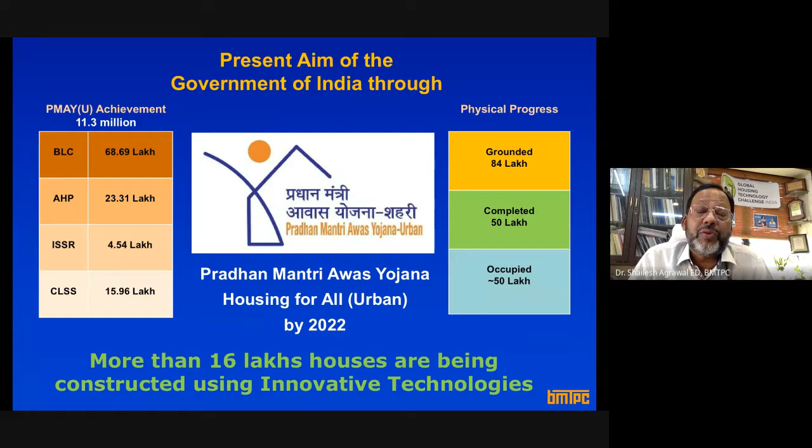Friends, this was the background: when we thought we have to build so many houses, do we have enough material? Do we have enough infrastructure to execute this? Can we do it within the time frame given to us, without vitiating mother nature, without vitiating our natural resources, without creating pollution and waste? So we thought it is high time we bring in technologies, systems or materials which are sustainable, which can help build faster, and which can help in the sustainable development goals and climate mitigation strategies, to which India is also committed, to reduce carbon footprint.

This is a slide for civil engineers. Normally, construction all over the world falls into two categories, as you can see in the pictures. One is load bearing construction, where you put brick by brick, create the wall, and then put the slab. The other is cast-in-place construction, where you create reinforced concrete beams and columns, and then do the infill walls. Now, these two approaches are slow track construction.

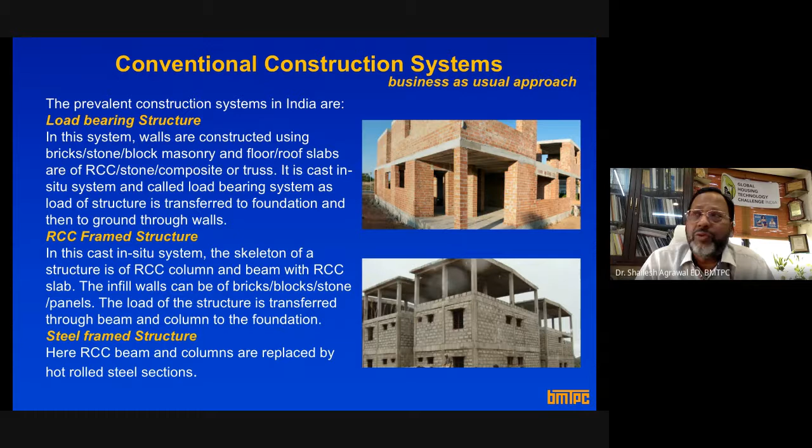They require a lot of natural resources and create a lot of pollution. The kind of material we are using is quite energy intensive. So all of this is business as usual, and if we continue to construct with these practices in vogue, we will not be able to achieve the target given to us, and we will be harming mother earth, encroaching upon natural resources which are already in short supply.

This is again a slide. Primarily the major construction materials are cement, aggregate, and water. Earlier it was said that you require a lot of water when you do any construction, because water is required for curing and such, and that water is potable water. You require drinking water, and water is scarce, as all of you know.

And there is another thing: fine aggregate, sand. Earlier there used to be a proverb saying the next world war would be fought over water. Let me tell you, the next world war would be fought over sand. If you Google 'sand war', you will be astonished to see that sand has all of a sudden become scarce. We never thought so, since we always used to extract sand from rivers or through mining, but nowadays sand is being manufactured. Sand has become a scarce material because we have been irrationally managing our natural resources. That is why, if you watch TV, you will find advertisements for sand making machines. Just imagine, now we have to make sand.

Similarly, during COVID time, we understood the importance of labor, skilled labor. All of a sudden, all the projects came to a halt. So can't we have industrialized systems where, whether it is a pandemic or any natural hazard, the work keeps going without delays? There is a shortage of skilled labor, and most construction is not up to the mark if we continue with this business-as-usual approach.

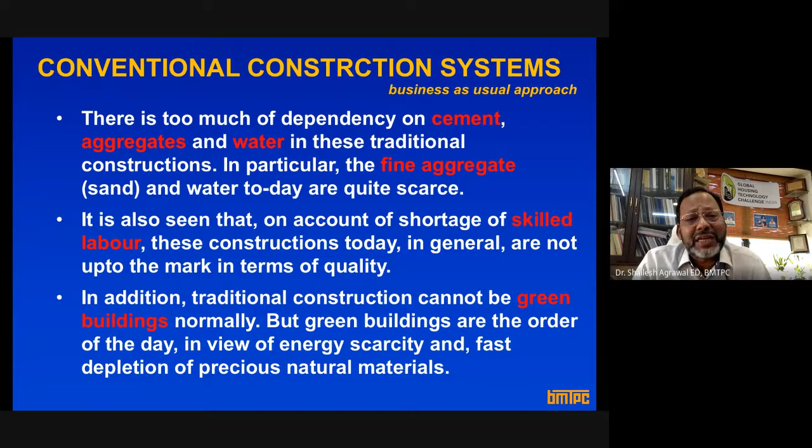Hiteshji was talking about how, earlier, as civil engineers, we never bothered and always took cement and brick for granted. But now these materials can no longer be taken for granted because they are unsustainable. Cement produces a lot of greenhouse gases, and its embodied energy requirement is high. Brick consumes topsoil and also emits greenhouse gases like carbon dioxide. So green buildings and sustainable practices are the order of the day, and we need to practice those in day-to-day construction and building our infrastructure.

Also, please take this from me: as a true patriot or true citizen of India, whatever we do, we have to do pretty fast. And when I say pretty fast, it doesn't mean sacrificing structural, functional, or other requirements. Speed doesn't mean compromising quality, affordability, sustainability, or disaster resilience. But whatever we have to do, if we want to lead the world, we need to bring in speedier construction systems and technologies in whatever we do.

Green, because this is something of green. Ever since I've heard this word green, everybody defines these green buildings in different ways. So I have written that green aspects can be explained in four major parameters: resource efficiency, energy efficiency, eco-friendliness, and health.

Resource efficiency means we cannot always take materials for granted, like cement, which is based on natural resource limestone, or steel, which is based on iron ore. So you need to bring in materials and systems which are resource efficient. I don't say don't use cement, don't use steel, but use them optimally. All of us know how work takes place at the site - there is no control on use of water, no control on use of other materials. So let's optimize the use, let's bring in natural resource efficiency.

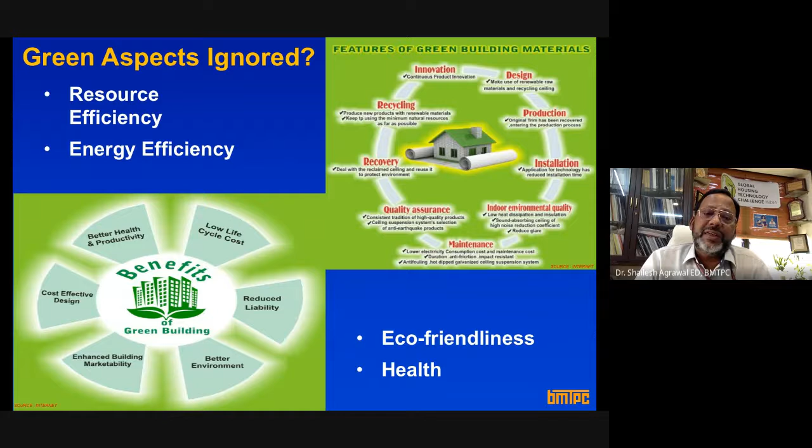So health of the occupant is also very important, and that is why greenness can be explained in resource efficiency, energy efficiency, eco-friendliness, and health of the occupants.

Again, this is a slide from Energy and Resources Institute, and because I am dealing with buildings, residential sector - buildings consume 40% of precious energy resource, 25% of precious water, and 40% of natural resources.

At the same time, building activities contribute 50% to air pollution, 42% to greenhouse gas emission, 50% to water pollution, and 48% of solid waste is being generated through building activities. So can we cut this down?

On one side, buildings consume precious energy, water, and natural resources, and on the other side, they contribute to pollution, greenhouse gas emission, water pollution, and generate solid waste.

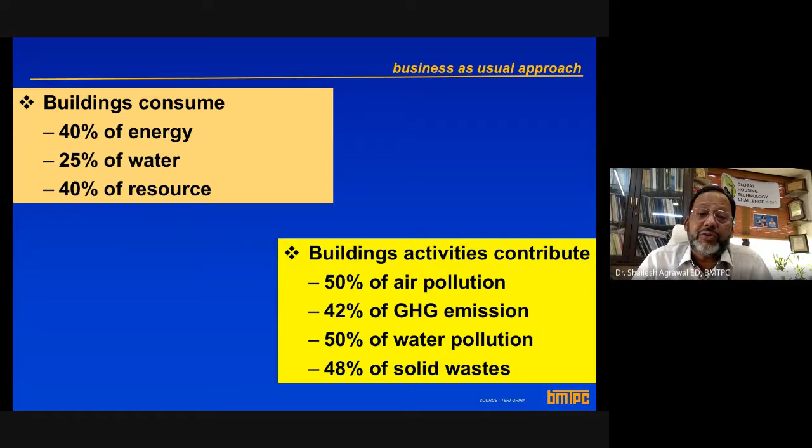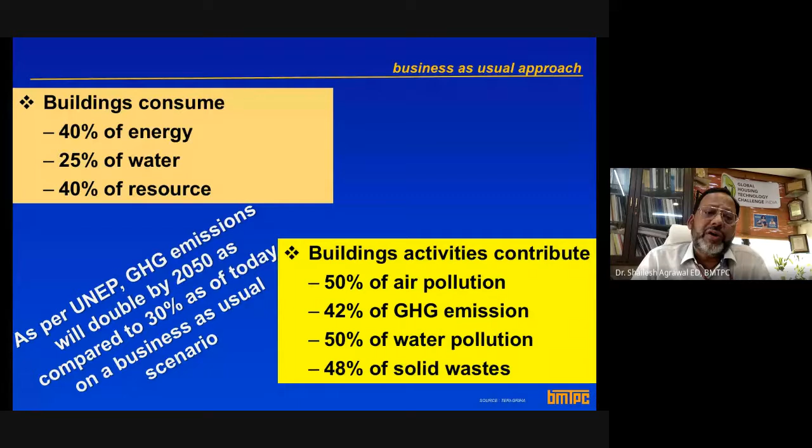Also, as a signatory to the Paris Agreement, we need to cut down our carbon emissions, and if we continue to have that business-as-usual approach to greenhouse gas emissions, and continue to use these building materials and technologies which are in vogue, the greenhouse gas emissions will double by 2050.

So what is required? We require something new. We require out-of-box thinking, and that is what is being done at Government of India level. We have come out with some technologies which I'll be explaining quickly.

So whatever I just explained is written here, that we require speed. Quality cannot be compromised anytime, and I come from a field of earthquake engineering, so we have seen structures showing no distress, and whenever there is an earthquake or a cyclone, those buildings start showing distress or extensive damage, and it happens because qualities are not up to the mark.

So quality is also very important. Safety - India is a country which is prone to natural hazards, whether it be cyclone, flood, earthquakes, and nowadays even thunderstorms. So safety of structure is very important.

Sustainability - this seminar is all about sustainability. So as civil engineers, as architects, or as policymakers, whenever we think of any project or build any infrastructure or building, sustainability has to be kept in mind. And sustainability is a very wide term. As I told you, if we can ensure energy efficiency, eco-friendliness, health, disaster resilience, somehow we are able to achieve that sustainability. Life cycle cost is another new term which is being coined now.

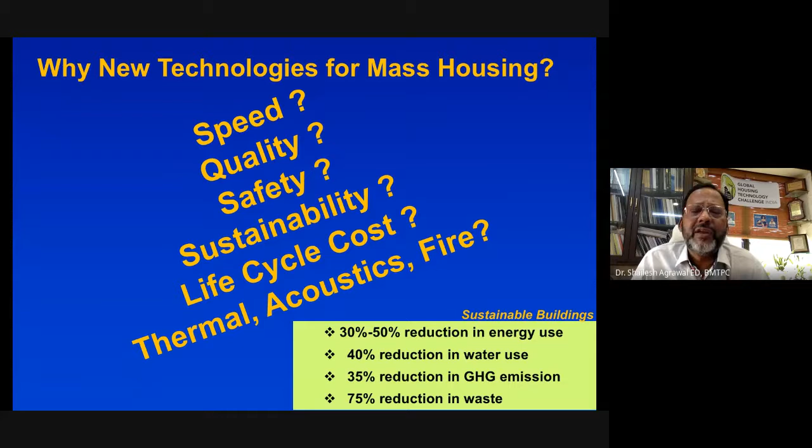And have we ever thought, whenever you go to any project site, you will find heaps of construction waste. So now, in times to come, there is going to be a rider that whatever waste you are producing during construction has to be consumed in that project itself. If you go to UK and places like that, you have to have zero waste product. So similarly, can the kind of waste we are producing be utilized in the project itself, or do we have systems, technologies and processes where we generate no waste when we do the construction?

This is a very interesting slide to show you, all of you can understand. These are the levels of construction technology all over the world - level 0 to level 4, and I will explain what level 4 is. Just let me pause for a second here, and you all try to assimilate this slide and think about at which level you are, or at which level you understand or know about. In the world, or even in India, we have reached up to level 4.

Most of you will agree that the answer in your mind is level 0. Level 0 is where we collect material at the site, call masons, supervisors, contractors, developers, and ask them to start building the structure, building, or bridge. So collecting material at the site and doing construction, that is level 0.

Level 4 is where the entire building, pre-finished, is done in the factory. All you have to do is bring that building to your site and start using it. It's like a plug and play home.

I give the example of plug and play. What is plug and play? Your USB drive is a plug and play device - you put it in your computer or TV and start seeing the movie, videos, photographs, or presentation. The same thing is being done in building construction. That is plug and play homes.

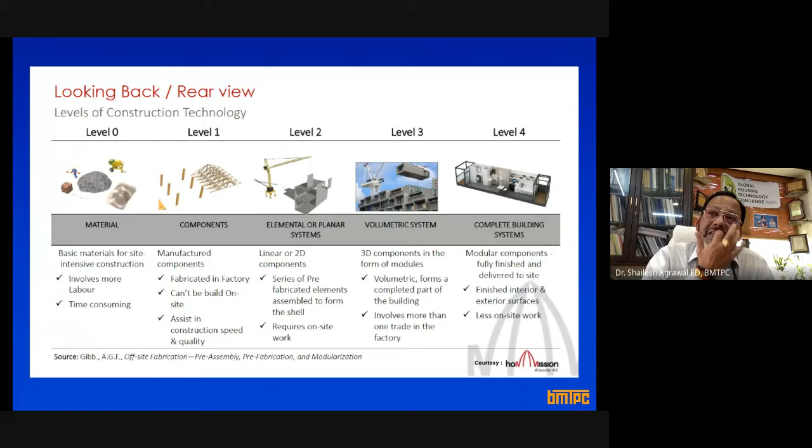As Ritesh was telling you, I normally don't preach - what I preach, I practice. So we are already doing a project at level 3, where building modules, or the rooms, will be treated as building blocks. They will be fabricated in the factory and then put one over the other to create the multi-story tower.

The world has reached level 4, and through the Ministry of Housing and Urban Affairs and the Building Materials and Technology Promotion Council, we are trying to take a leap jump - I call it a pole vault. So from level 0 to level 4, we want to reach, and that's our sincere attempt.

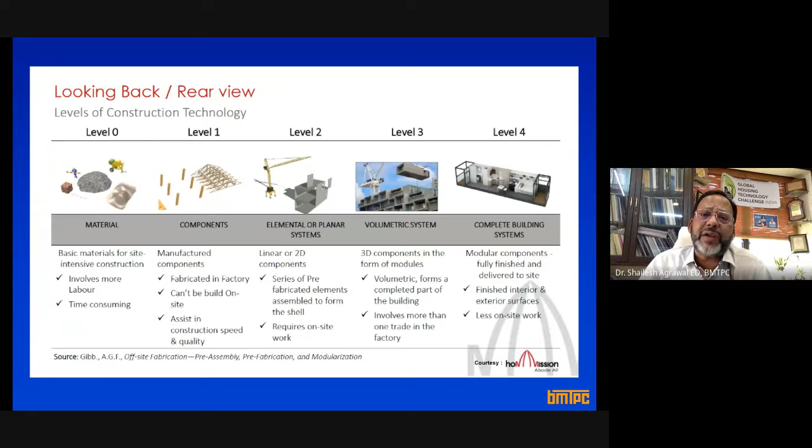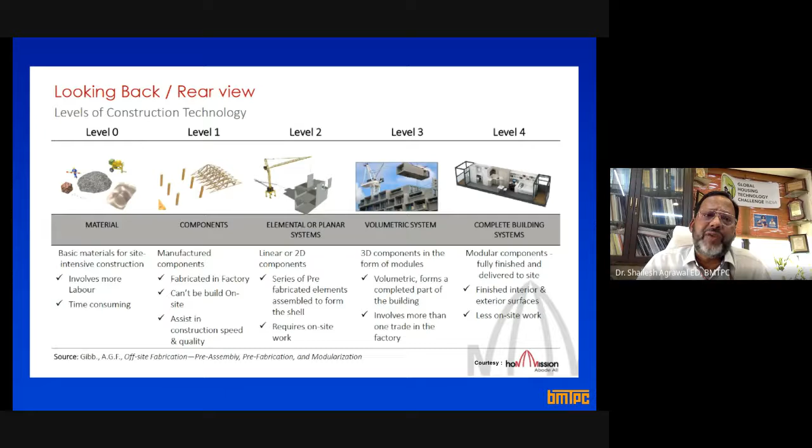You all will agree with me that the background I gave shows the advantages associated with taking a jump from level 0 to level 4. I'll go through this slide very briefly now.

All these technologies are customized. So a new term has come into the market: design for manufacture and assembly. You go to the tailor and ask him that as per your requirement, your size, your fit, you get the shirt or jacket made. The same thing can be done in building and infrastructure construction.

There are companies who are like the tailor - they do design for manufacture and assembly. Give them your requirement, give your sizes, and they will do everything for you. They will create a plant, construct the building themselves, and then bring it to the site.

So there are agencies now - no longer just contractors and developers, but agencies who do design for manufacture and assembly. I also want to coin a word here: manufacturing of buildings.

Just try to think - instead of constructing a building, we are going for manufacturing of a building. Once you understand the difference between constructing and manufacturing a building, you understand what I'm talking about. Manufacturing a building means you take the entire operation from the site to the factory, and you start manufacturing a building.

If you visit any car manufacturing facility, you'll see assembly line production, where each person puts one part, and the end product is the complete finished car. The same thing is being done in buildings, where components are put together piece by piece, and at the end you get the building manufactured. There are agencies in India already doing this.

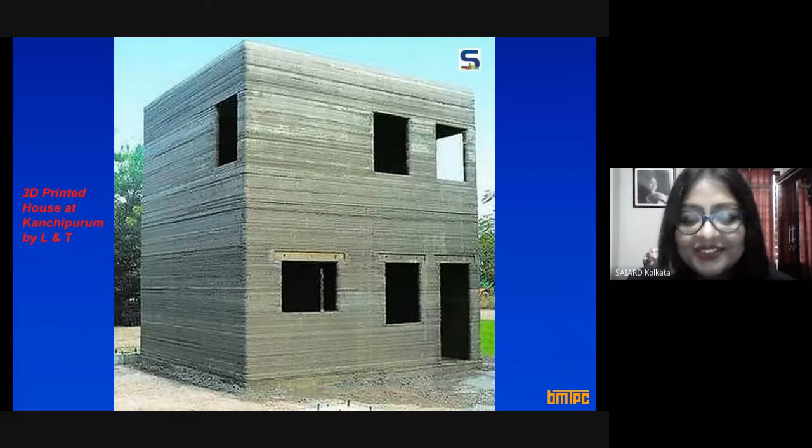Sorry to interrupt you, sir, but you had 25 minutes, and you've already gone over the time limit. It's okay, you just finish it. It's okay, 5 minutes, I'll finish, no issues. I will finish in 5 minutes.

So this is again a slide to show you that right here in India, this is the 3D printed house. I was fortunate enough to be part of this initiative, and it was inaugurated by the Honorable Finance Minister. This is in Kanchipuram in Tamil Nadu, the 3D printed building.

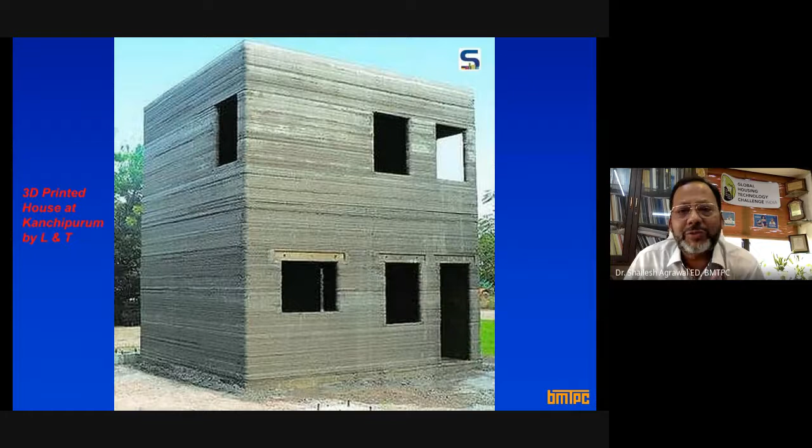All of you know 3D printing means you give a command to the computer, like creating a picture or a Word document, and your computer gives you the printout. In a similar fashion, you give a command, and here you have a cartridge, there you have construction ink. Construction ink is nothing but a special kind of cement, and by a click of command and through robotics, you can print this kind of building. So this is the first 3D printed building in India.

With this background, let me tell you that we have shortlisted around 54 new construction systems, which are broadly classified into 6 broad categories. I will not go into detail because I am already encroaching on your time.

So what you can do is, if you are interested in these construction systems, go to my YouTube channel. Type my name or BMTPC, and you will get a whole lot of literature and educative films. We have created video lectures also in pedagogy form, where you can learn and understand about these construction systems.

I'll just tell you these construction systems are broadly classified into 6 broad categories: formwork systems, stay-in-place formwork system, sandwich panel system (also known as drywall construction), steel-based structural systems, and precast concrete construction system.

Let me tell you about precast concrete construction system. All of you might have seen how the metro is being done, how earlier bridges were constructed, and how bridges are being constructed now. The girders and columns are made in the factory, and one fine day the columns are erected, the girder is put over them, and then the metro operation starts. Similar kinds of things are being practiced in the construction sector.

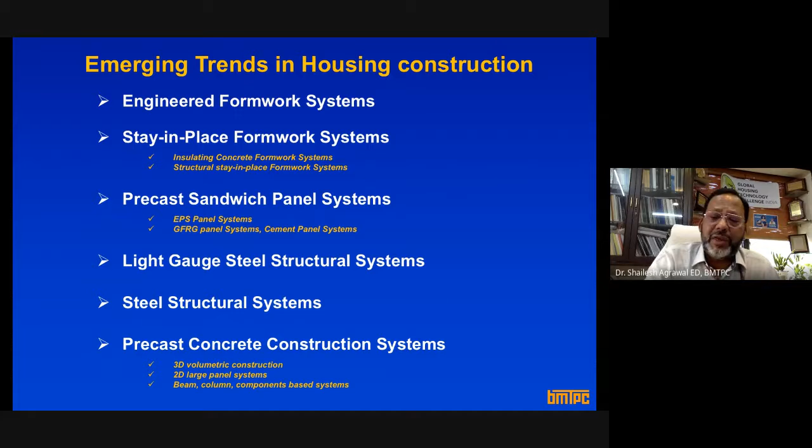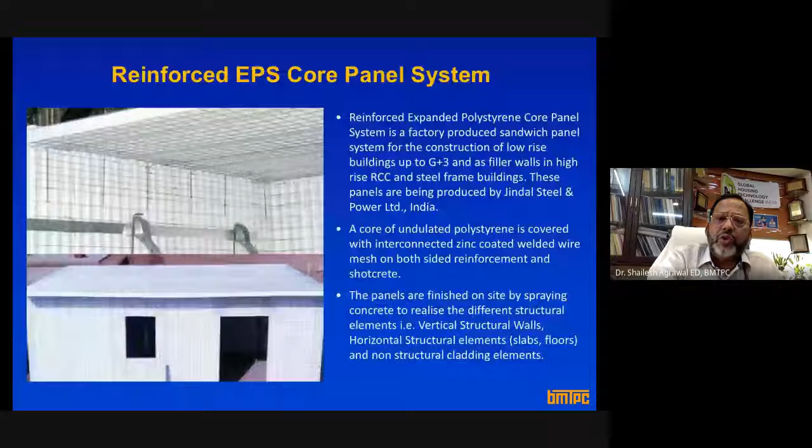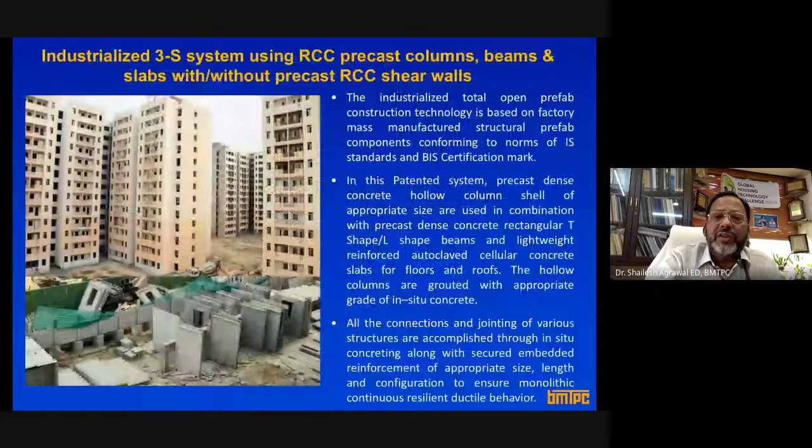Let me not give you all these details. I will just give you one slide, because since Hiteshji was talking about the global housing challenge, looking at all these needs, even our Honorable Prime Minister was quite fascinated by these new construction systems and thought that we should bring these technologies to our country.

What we did was conceptualize the Global Housing Technology Challenge, and we floated a challenge to global technology providers and global agencies: can we have construction systems which can help build the maximum number of houses in minimum time and minimum cost? We threw this challenge at a global level to the world, and that challenge was a huge success.

It was inaugurated by the Honorable Prime Minister in March 2019, and through that challenge we could shortlist 54 new construction systems. The details of those systems are available on this website. Please make a note of this, it's a very informative website. You will get all details about technology, systems, and our initiatives there.

GHTC stands for Global Housing Technology Challenge. Go to GHTC-India.gov.in to get the information. So these are the 54 new technologies, again divided into 6 broad categories. I'm not going into the details of this technology.

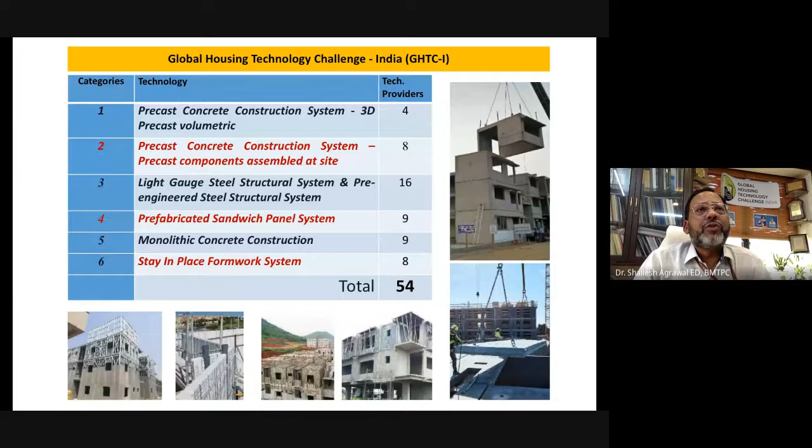So all these 54 technologies are available now, and we want to make these technologies for the future. As I was telling you, walk the talk - we have already started lighthouse projects where we are constructing more than 1,000 houses at 6 locations, which I will show you. Using these 54 technologies, we are constructing 6 lighthouse projects.

Lighthouse projects are like incubation centers where all of you can go see the implementation of these new technologies, learn these technologies, and adapt them in your future. The idea is to adopt these technologies and make them technologies for future construction in India.

These are the 6 lighthouse projects. The foundation stone laying ceremony for all these projects was done by the Honorable Prime Minister in virtual mode on 1st of January 2021, and all these projects are running pretty fast. The construction time given for completion is 12 months, and whosoever does it fastest, there is prize money - an incentivization.

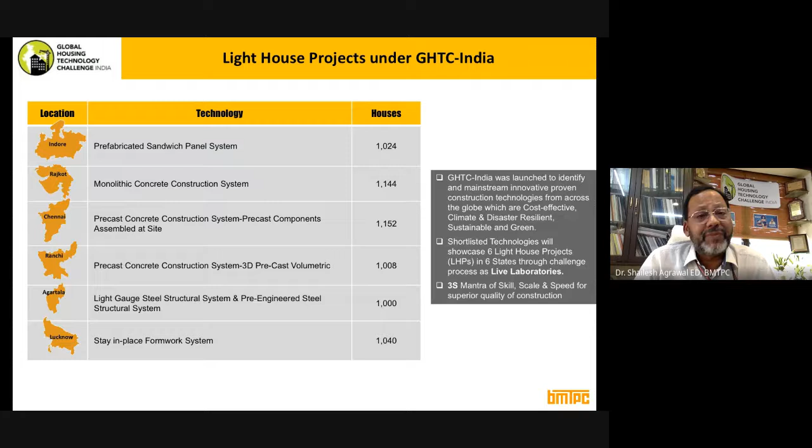Through this platform, while inaugurating these projects, the Honorable Prime Minister urged that all stakeholders, including students, faculty members, and policymakers, should visit this project and understand about these technologies and start using them. This is the slide to show you that the Prime Minister did that.

We are also calling these lighthouse projects live laboratories, and we have started a scheme called Technograhi. I urge all of you, if you have not registered, to enroll yourself as Techograhi, a word given on the lines of Satyagrahi.

Satyagrahi was the word given for freedom fighters by the Father of the Nation, Mahatma Gandhi ji. After that, when we started Swachh Bharat Mission, we coined the word Swachhagrahi, and now we have coined the word Technograhi - a word for all stakeholders who would be the change agents of innovative and sustainable construction technologies. You can all get enrolled free of cost.

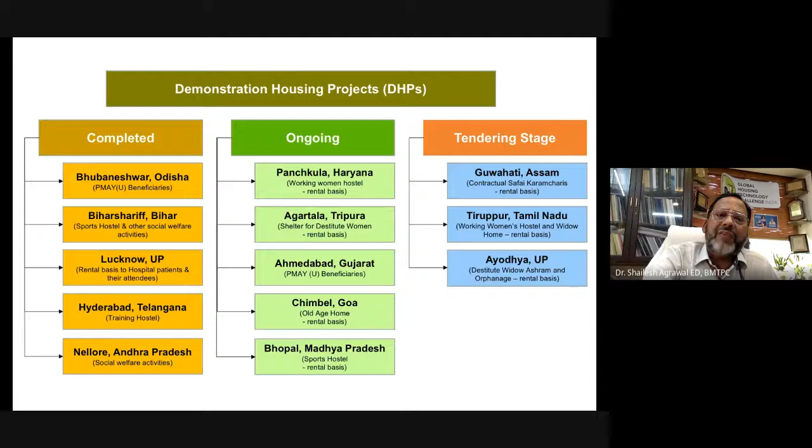The moment you enroll yourself as Techograhi, you will be connected with the Ministry and us, and you will get to know the progress of all these projects. You will get to know about the latest trends on all these things. So with this, I will finish - this is my last slide.

I'm sorry for encroaching on the time. So let's be part of India's growth story by reforming, performing, and transforming. And if you have anything to ask me, you can always write to me on my email. Thank you very much.

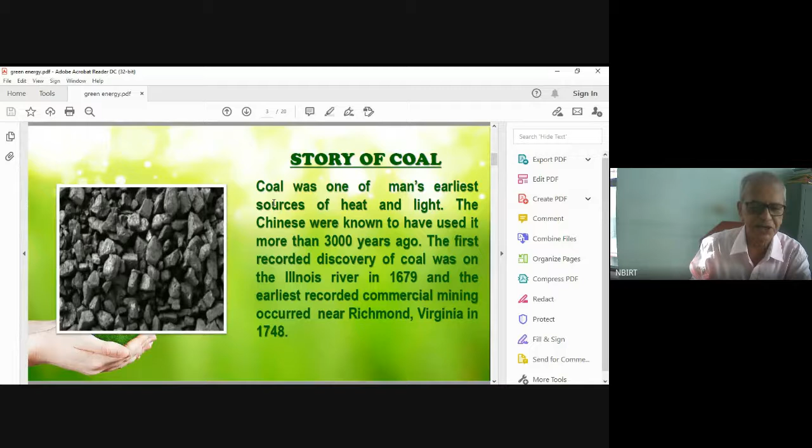Now we generate electricity in India. Our electricity generation, 60% still comes from coal, though recently you have seen in the newspaper we achieved 100,000 megawatts of renewable energy, green energy. Still India produces 60 to 65% of energy from coal itself. So this is the history of coal, and coal will continue to be used in the future also.

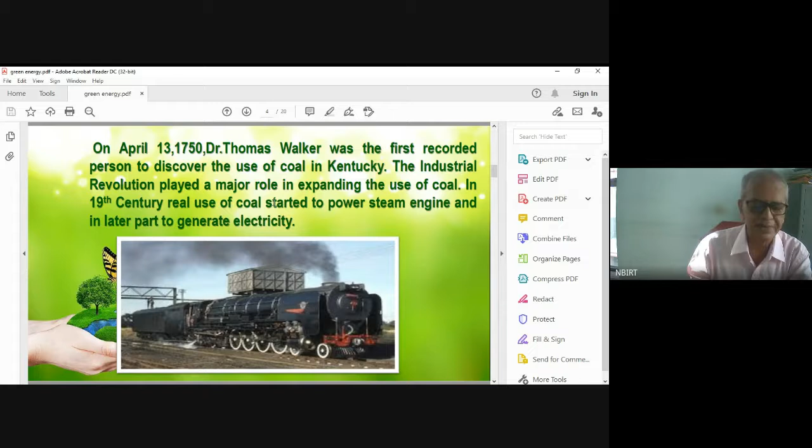We will be depending on coal up to 2040, 2045, and then maybe we will switch over completely to renewable energy or other alternative energy sources, maybe beyond 2045. So for the next 20-25 years, we will be depending on coal, but this dependence will be phased out gradually because it is polluting in nature. I'm coming to that.

Next is the story of oil. The Chinese again were the first to use petroleum as fuel as early as the 4th century BC. The earliest known oil wells were drilled in China in 347 AD. At that time, oil was used to evaporate brine to produce salt and other things, not for generation of electricity or really for producing energy in real terms.

But that was the beginning of the use of oil. The modern history of petroleum began in the 19th century, again like coal, with the refining of paraffin from crude oil. In 1846, in Baku, which is really the capital of Azerbaijan now - I've been to that place also - they started oil exploration by drilling 21 meters and struck oil. The kerosene lamp was invented in 1854. At that time, the invention of the kerosene lamp was a big thing, a revolution, and there we used the petroleum product for the first time, kerosene for lighting purposes. So that was the early story of oil, how oil was used to generate electricity.

Still many people in India, about 20 crore people, still use kerosene lanterns in many remote areas, remote villages. But it started many years back in 1854. We started using this kerosene lantern.

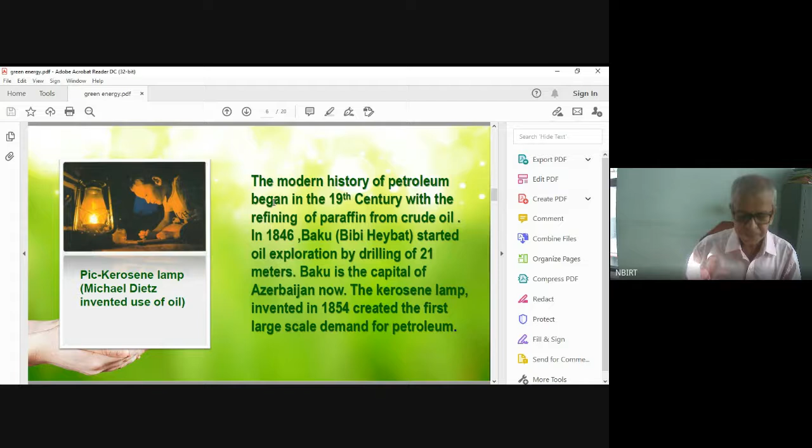Till the 1950s, coal and oil were the main sources of energy. In 1954, the Russians set up the first nuclear power plant of capacity 5 megawatts. At that time, it was the general opinion that nuclear power would solve the world energy crisis. In the 1950s and 1960s, we were very hopeful about nuclear power. We thought no use of coal, no use of oil, we will solve the energy problem and go for nuclear power. In fact, in France, they started depending on nuclear power up to 76% of their power.

Came from nuclear. But as you know, later, in the 80s, the Chernobyl accident, and later the Fukushima accident and other nuclear power plant accidents occurred. Then gradually nuclear power started declining. And throughout the whole world, nuclear power is now not considered a main source of energy in the future because of safety and other issues.

The pollution started with burning of coal and oil. That is the real reason why we have shifted towards green energy. We are discussing today about green technology.

Before 1975 or the 70s, we never thought about pollution. But from 1975 onwards, we thought about pollution, global warming, and climate change. These issues came up in the 80s and 90s, with the Rio conference and other major environment events. We first started targeting coal and oil as the main source of pollution.

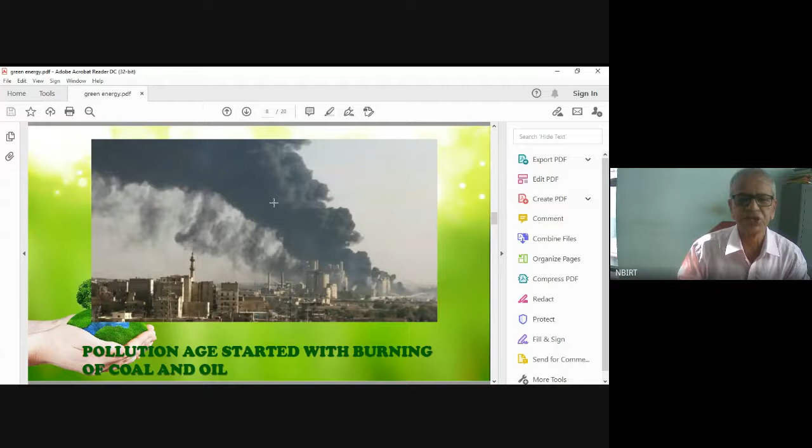Already 50% switching over will be done. Many countries have declared that by the year 2050, they will shift towards renewable energy up to 50%. India also, to keep its commitment, by 2030 is to reduce its emission by 33%. So if India is to do that, India will also depend on exploration of renewable energy, because they have to.

The Prime Minister has already announced our first target is 175 gigawatt renewable energy by the year 2022. 100 gigawatt we have already achieved. By the year 2022, 175 gigawatt, and by the year 2030, 450 gigawatt, that is 450,000 megawatt of renewable energy shifting. That means the future scenario will be totally different.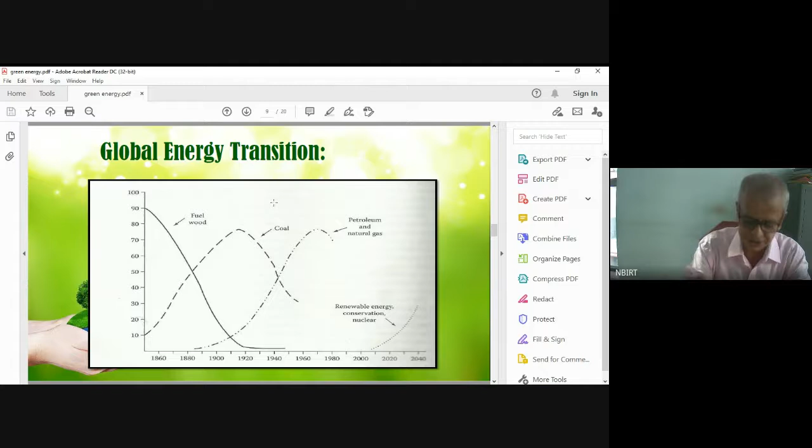These are all green energy technologies. You can see solar power, wind power, microhydro, which is also clean energy with no pollution, and biomass-based energy sources.

So from all these energy sources, we are supposed to generate 1,75,000 megawatt. Please note, 2 lakh megawatt is our energy demand now. We are going to generate about 1,75,000 megawatt of energy by the year 2022 from these sources, and by the year 2030, our target is 4,50,000 megawatt.

Out of many forms of renewable energy, solar energy appears to be the most attractive. Though wind energy is also in the forerun, and we are doing very good in wind energy, with countries like UK, Germany, and the US also doing very well in wind energy programs. But worldwide, solar energy is the most popular and attractive renewable energy solution.

Out of many sources of renewable energy, you can see solar energy. Everybody knows about solar energy now. Even a poor villager living in Arunachal Pradesh, where you may have to walk 3 days to reach, I have visited all those areas and done some work there. Those people know solar energy.

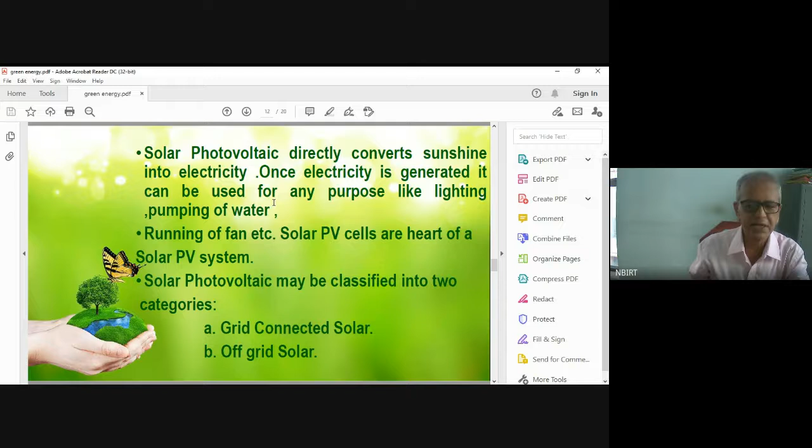In a grid connected system, the solar power generated is directly exported to the grid. If you have a smart house, smart building or green building, you can put up solar power panels on your roof to generate electricity. You don't need any battery. You just generate electricity during daytime and connect your system with your own domestic grid, exporting whatever you generate.

If your monthly electricity bill is 5,000 rupees, and you generate solar electricity costing about 3,000 rupees, you get the net metering benefit, so your net bill will be 2,000 rupees. You can even go for zero energy billing.

If you properly calculate your energy requirement and put up the solar power plant on your roof accordingly, your electricity bill may come to zero. In many colleges, we have installed rooftop solar power plants where the electricity bill has come down by almost 95%. Earlier the bill was 5,000 or 10,000 rupees; now it is only 1,000 or 800 rupees per month. It's a very unique and popular system, coming up in a big way.

In an off-grid system, solar energy charges a battery, and this is used where there is no electricity. There are many people, about 20 crore in India, who still don't have access to electricity. To give them energy, we can utilize solar power with a battery system to generate DC power, which we convert with an inverter to AC power, so that any AC load can be operated.

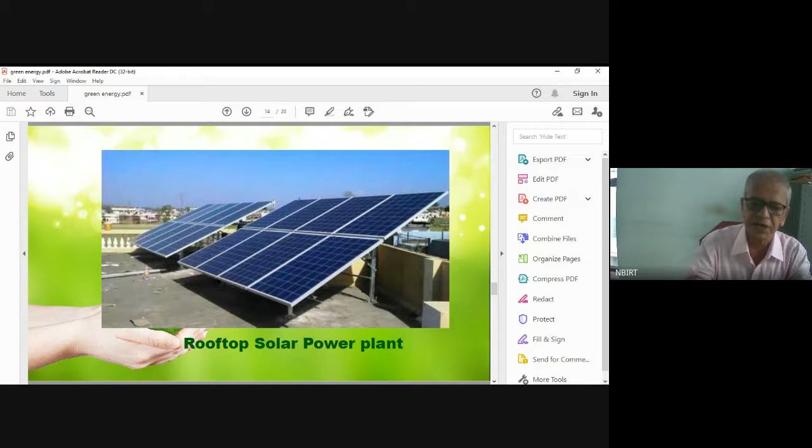What are the components? You need a roof space of 100 square feet per kilowatt. Solar panels are 350 watts each. You have to buy a module mounting structure, since the solar panels have to be mounted using galvanized steel structures. You also need one inverter of suitable capacity, cables, a lightning arrestor, and a battery if it is an off-grid system. So these are very simple, only 4 or 5 items you need.

Many people think, what is a solar power plant, very complex, very complicated? No, it is not at all. And there is no rotating part - that is the unique thing. There is no wear and tear. Only a static portion; everything is static.

You have to install the solar power plant, and your building, if it emits nothing, can become a really emission-free building by using your solar power plant. You can become a green building, green power generator. So that is very important.

In future, green buildings are coming in a big way. Corporations are putting green building construction into the bylaws for new building constructors. The regulation, rules, and policy of the government now promote rooftop solar power plants. So if you want to become a really green person, or the owner of a green building, you have to go for a rooftop solar power plant.

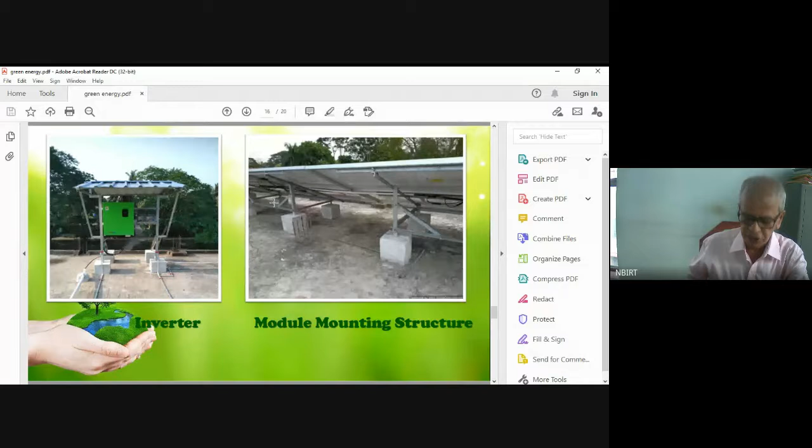Rooftop solar systems are becoming popular in urban areas. It is a clean energy source. The government has declared an incentive scheme for rooftop solar power plants, and regulation has also been notified by the regulator.

So that is another facility given by the government - it's not that you put up a solar power plant on your roof and the distribution company, like CESC or WBSEDCL, comes and says you have not taken permission, we will not buy your power. They have to buy it. That is the regulation now, that is the rule now.

India has a plan to install 40,000 megawatts of rooftop solar power plant by the year 2022. This will ensure our environment stays clean.

Now, I'll just show you some recent technologies for this. We are a research institution, and we are doing a lot of research activities on solar energy.